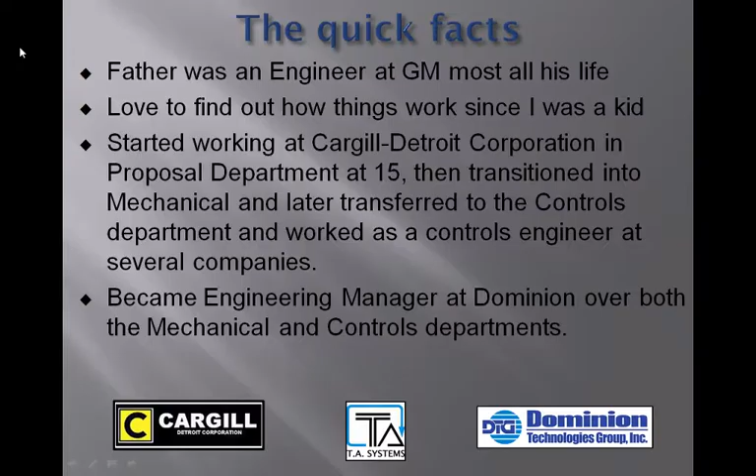So this is the non-contact alignment machine that I developed at Dominion Tool and Die. It's now Dominion Technologies. It aligns the vehicle with a set of lasers. The biggest hurdle we had to overcome here is mechanically how to support the vehicle without inducing forces that would throw off the alignment. We solved that after a lot of research and found that floating the vehicle on air bearings worked perfectly for the application.

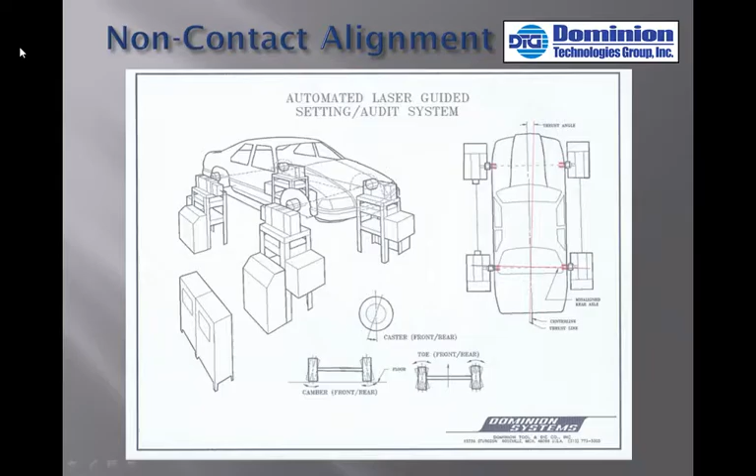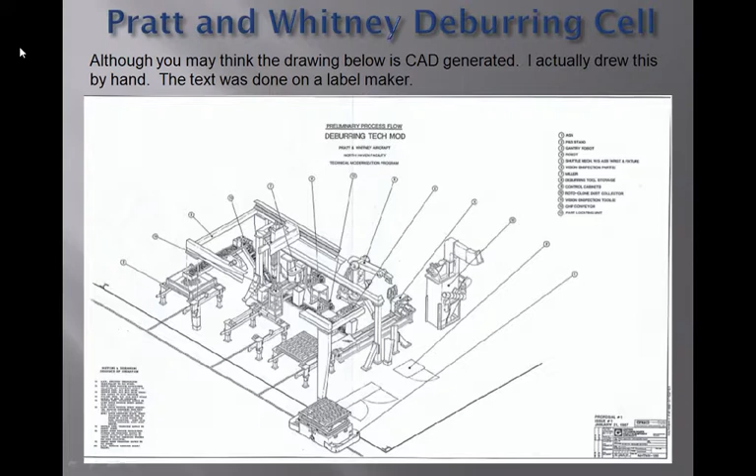Here is a Pratt Whitney deburring cell. It's an isometric, which is hand-drawn. I know that's hard for you to believe in today's CAD world, but this isometric was hand-drawn by me. It took me about 3 weeks to do. All the text was done with a label maker. I'm pretty proud of that. It's pretty amazing, don't you think?

Here's an example of some of the sketching that I do. This is for a wheelchair interlock that I did on a contract basis for Q'Straint down in Fort Lauderdale, Florida, to latch a wheelchair into place in a vehicle.

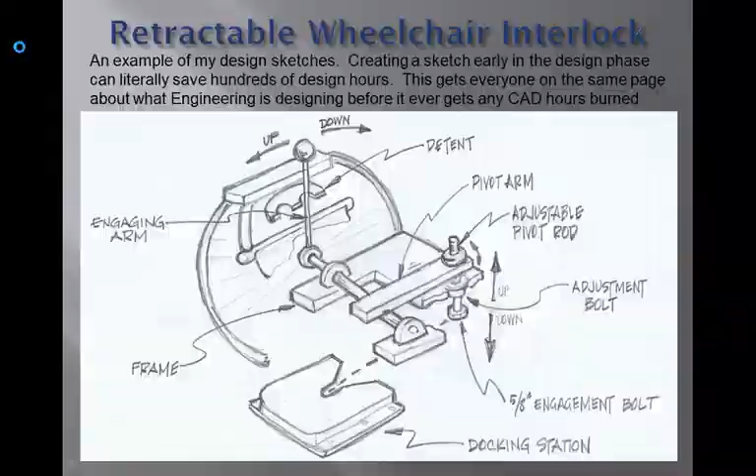I worked in manufacturing and engineering at L&L Products for 11 years. Pretty much everything there we developed ourselves. Tooling, special machines. They're fabricated by our tool room and assembled by our maintenance department. If you designed it, you lived with it the whole while it was in production, cradle to grave. All while you were doing that, you're also supporting production needs and requirements. At L&L, I was a member of the safety committee and chaired the ergonomics subcommittee, working to ensure a safe environment for all the workers.

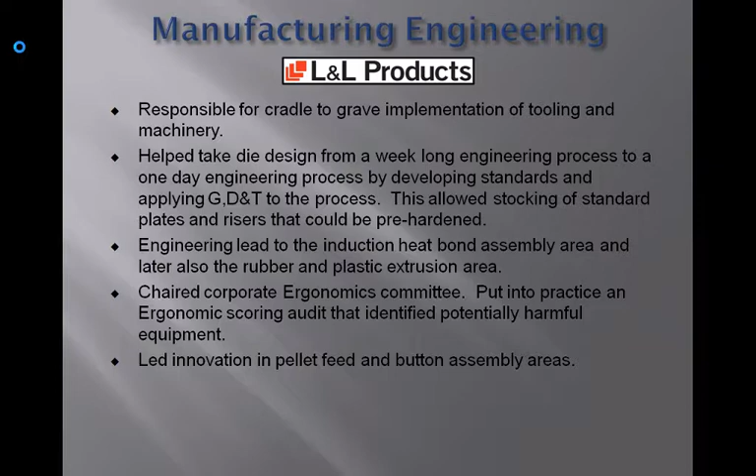Inline pushpin development was one of the two projects that impacted not only production but also people. It was integrating the pushpin assembly process into the die cut to avoid secondary assembly. Originally, seals were die cut and then sent to have pins inserted later. The new process put the pin guns on the die, inserting pins as the seal progressed out of the die. Operators would pack them for shipping right from the extrusion area.

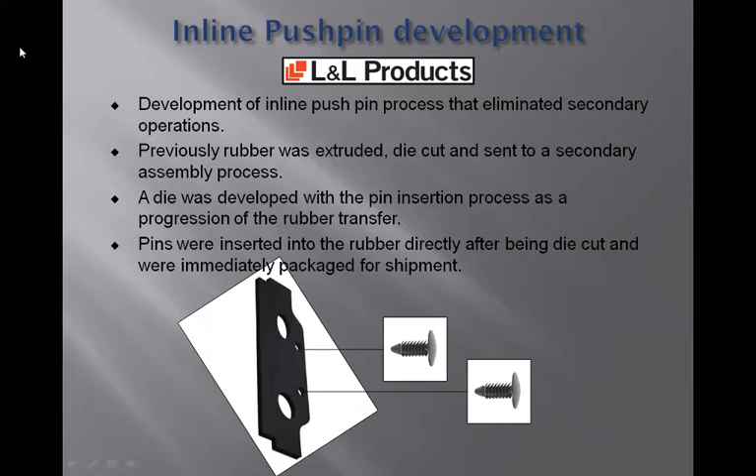Seal knockout and stacking. This is the second project I'd like to present. It goes right in hand with my involvement in the ergonomics committee. This article appeared in the L&L newsletter, written by me. So, picture a 12-inch wide strip of rubber being fed through a press die. The seals are cut and they stay in the offal, which is the scrap around the part. That gets recycled later. Operators would use their hands to push these out, sometimes at a production rate of up

to 60 per minute. In the new process, the parts are pushed out either as they are cut or after a couple of progressions by a spring-loaded plunger in the shape of the part. They are stacked right onto a conveyor. The operator can program how many parts they want in a stack, and then they pack them directly into a box.

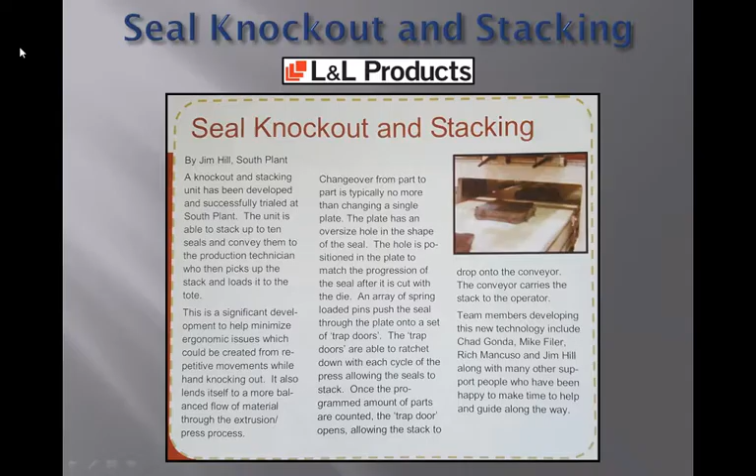Unfortunately, all good things must come to an end, and L&L went from 800 employees to 300 during the Great Recession. I was one of the last engineers to lose my position. Afterwards, unable to find a job, I contracted engineering work, even contracting all the die design from L&L Products. Some friends of mine had gone over to RedViking Engineering, and they called me to work on a special project for them. After about 6 months, the company asked to hire me directly.

At RedViking, I worked on various automotive assembly and test equipment, exhaust gauges, and worked as part of a team that increased Pratt & Whitney aircraft turbine engine production from 1 unit a week to 1 unit per shift. I won the RedViking President's Award for my dedication to getting the job done. And I was part of the mechanical steering committee to develop mechanical design standards and also SolidWorks standards to move the entire engineering department in one direction.

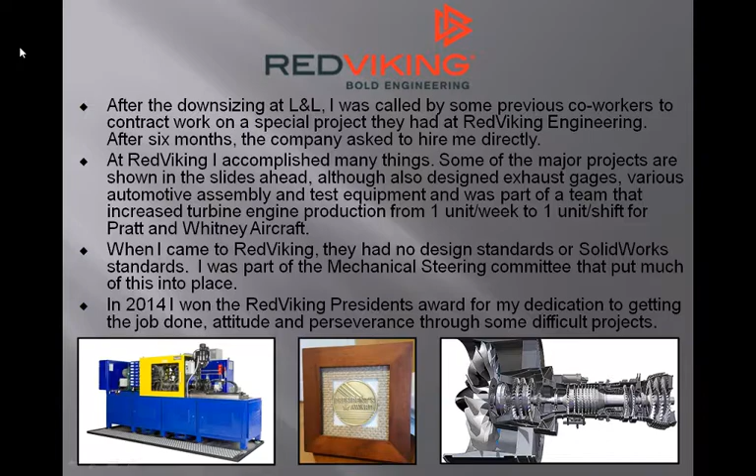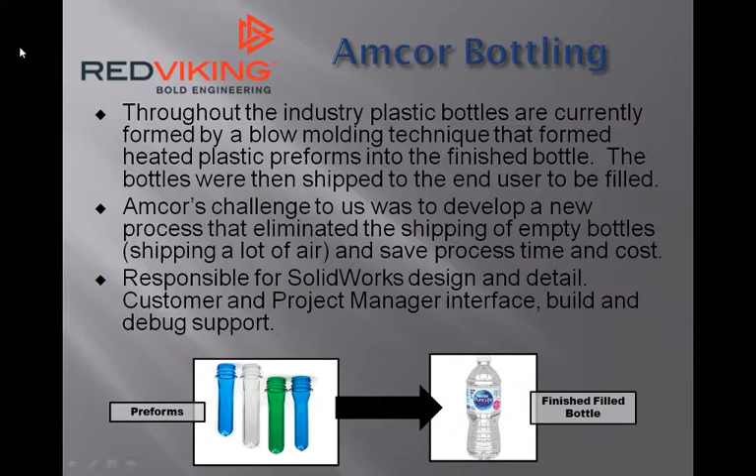The project that I was called over to RedViking to work on was for Amcor Bottling. They were looking for a new process to form their plastic bottles. Plastic bottles are currently formed using an injection molded preform that is heated and then hot air is blown into the mold, forming the bottle. The bottle is then shipped to the end user. So this shipping is now shipping empty bottles, which is basically shipping a lot of air. I was responsible for the SolidWorks design and detail, customer and project manager interface, build, and debug support on this project.

So the new process was to form the bottle with the fill liquid. This required a design that would flow the liquid fast enough to form the bottle before the preform cooled, and also to seal the bottle from the ensuing hydraulic pressure.

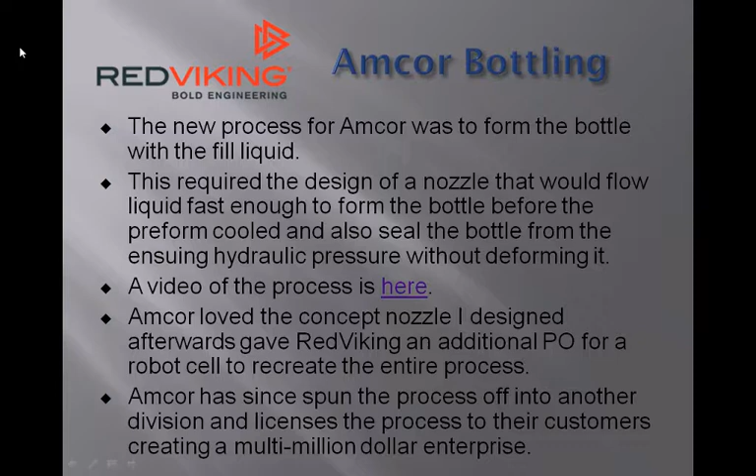Amcor loved the nozzle. It worked fabulously. They gave us additional POs for additional concept nozzles and also for a robot cell to recreate the entire process. Amcor has since spun off the entire process into another division and licensed it to their customers, creating a multi-million-dollar business. Here's a picture of the nozzle with the cross-section.

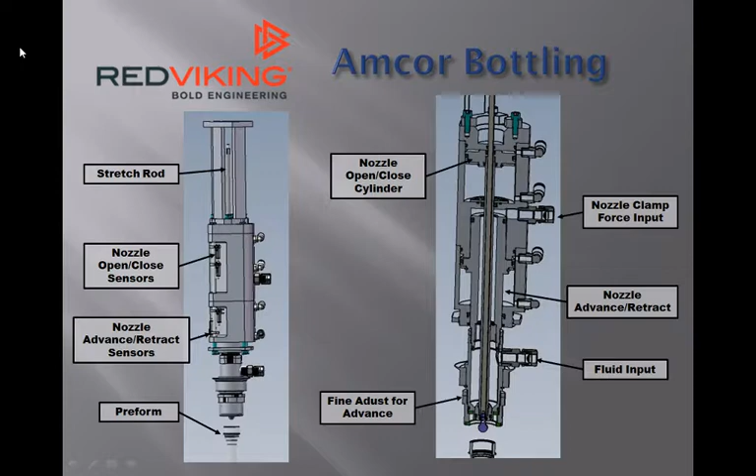Another project I worked on at RedViking was a Boeing CNC drill jig. Boeing was looking for a replacement to their current drill jig that was not accurate and repeatable. They wanted a repeatability of 4/10,000ths of an inch from hole to hole, with the entire drill jig weighing less than 100 pounds. I was responsible for complete design of the unit in SolidWorks with translation to AutoCAD, interface with the customers, project management, and controls designers.

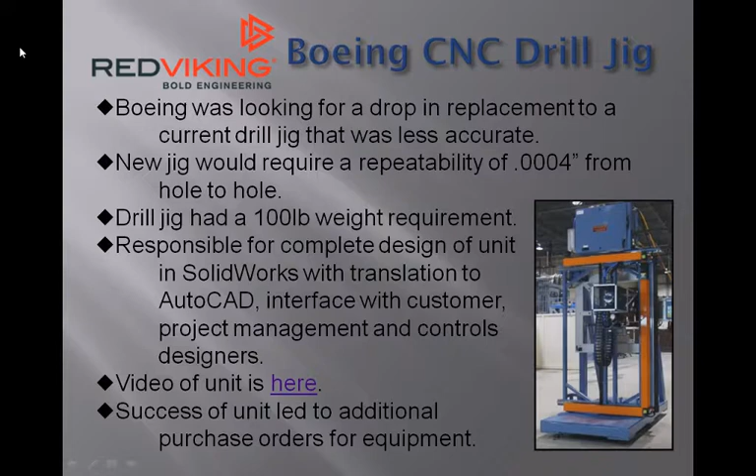Success of this unit led to additional purchase orders with Boeing. The last project I worked on at RedViking Technical Engineering Center in Raleigh before they closed it was a vibration test cell for BorgWarner. This included 2 machines, robot, reject and pack out conveyor loops.

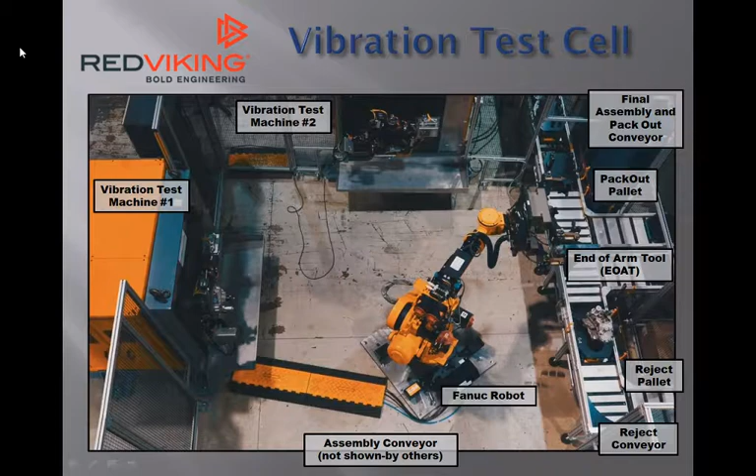Here's the guts of the test machine, most of which I can't show on the web as it's proprietary. I can talk about it with you directly if you're interested. Again, please contact me. I'd be happy to discuss it with you. All of what is shown was covered in the video that was in a previous slide.

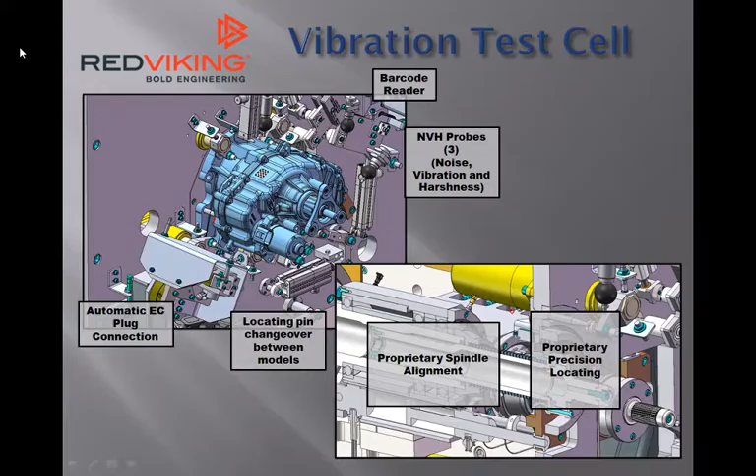I'm open and sharing of myself, my knowledge, willing to help, come up with ideas. I communicate well. I respond to emails and voicemails promptly. I'm collaborative, working with others. I really love team cohesion, dynamics, and interpersonal relationships at work. I'm an effective communicator. I tend to be able to stimulate and motivate others, while still being responsive to people's needs and concerns. I'm very approachable. I've been told I'm a great teacher.

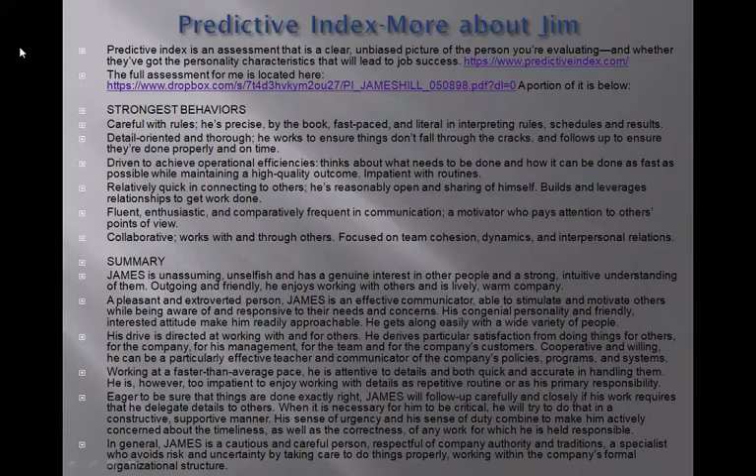And also, although this says I avoid risk, I tend to love new technology and love to implement new technology into designs on a calculated risk. Always, if I feel that there is any risk involved, I like to have a plan B or C in my pocket in case something goes wrong.

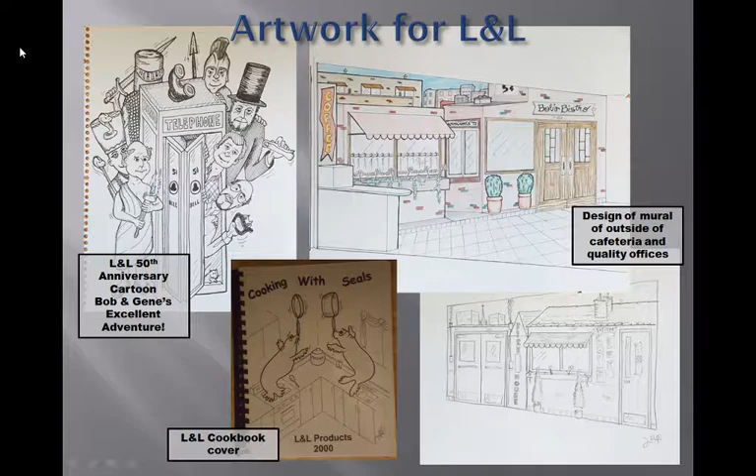Questions or comments? Maybe you just want to discuss some of the things I've done or my teams have designed. Contact me by mail or by phone. I'd love to talk to you about my accomplishments and what I can do for you and your company.